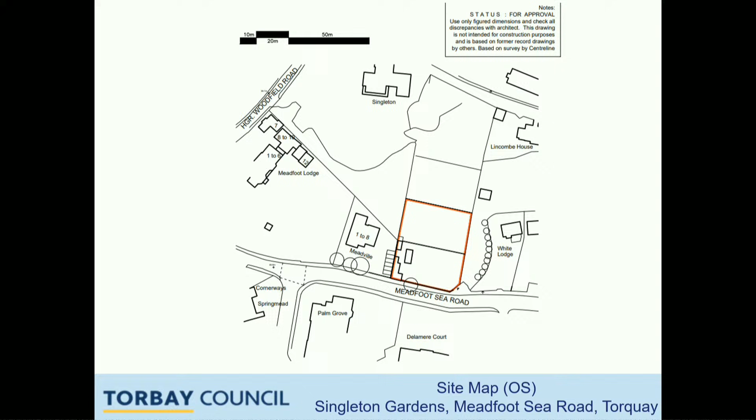Thank you. So the application site is Singleton Gardens, which featured a residential dwelling with an associated garden on the northern side of Meadfoot Sea Road in Torquay. The property was a 2-storey dwelling which was modest in scale and set within a large plot. The site featured stone and rendered boundary walls, and the land rises from the south to the north. So the site is located within an existing residential area, is designated as flood zone 1, is situated within the Lincombes conservation area and is subject to an area tree preservation order.

So householder planning application P/2023/0994 was granted consent on the 5th of March 2024 for alterations to the existing dwelling, which included the demolition of existing extensions, formation of two-storey and single-storey extensions, roof alterations and replacement fenestration, demolition of the greenhouse and outbuilding, landscaping and associated works.

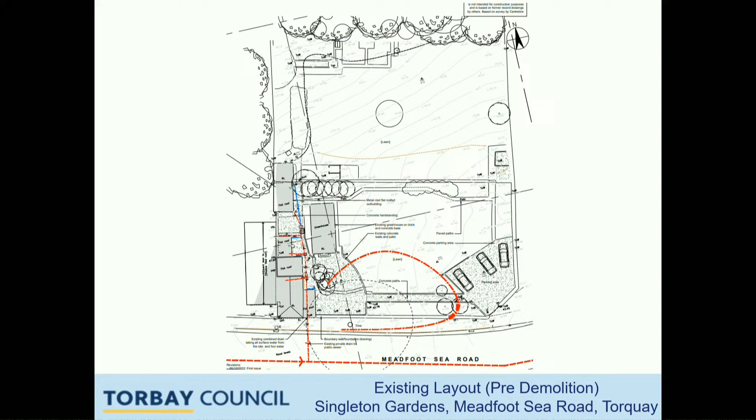So this plan shows the existing site layout pre the demolition works. You can see that the existing dwelling was located in the southwest corner of the plot and was built into the boundary walls. The plot included a number of disused buildings, including a greenhouse which has now been demolished, and there is an existing vehicular access at the southeast corner off of Meadfoot Sea Road.

So the current application is seeking to regularise the unauthorised partial demolition of the original dwelling house, including a boundary wall facing Meadfoot Sea Road, and seeks consent for the construction of a replacement dwelling. The application also seeks consent for retrospective demolition of the greenhouse and the demolition of the outbuilding, which were previously approved but no longer authorised, given the previous consent authorising this is no longer implementable.

So the key differences between the previously approved application and the current application is the partial demolition of the original dwelling and wall facing Meadfoot Sea Road and the rebuilding of the dwelling using modern materials and methods. The wall facing Meadfoot Sea Road will be rebuilt using reclaimed stone where suitable, and externally the footprint of the replacement dwelling is the same as the works approved under the previous consent, as is the height of the building and the roof form.

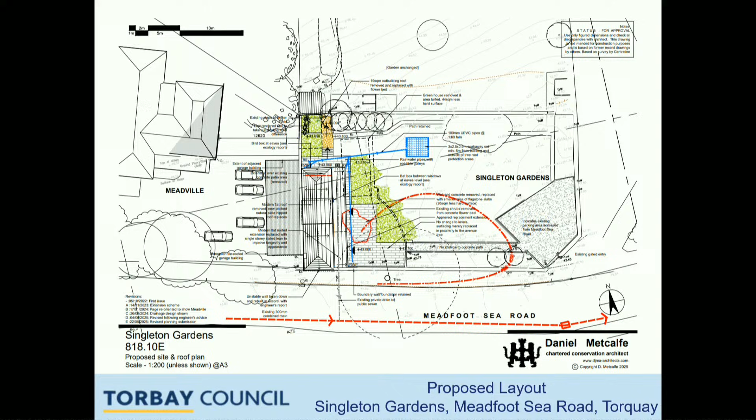So the proposal also includes landscaping works, which will include the removal of an existing low wall and area of concrete adjacent to the dwelling, which will be replaced by flagstone slabs and a larger area of lawn. So the greenhouse and outbuilding, which will be demolished, are shown on this plan in dashed black outline, and the greenhouse has already been demolished.

So the following slides are just quickly showing you the comparisons between the approved householder application and the current proposal, just to allow for easy comparison. So on the left is the approved ground and first floor plans, and then on the right is the currently proposed floor plans.

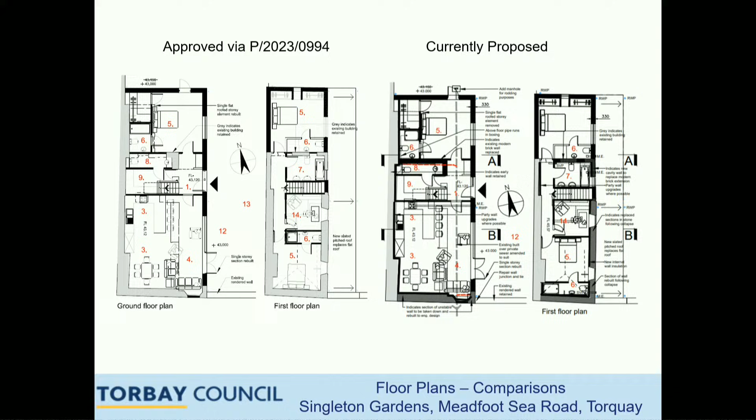The top set of elevations are the approved north and south elevations with the corresponding currently proposed elevations below.

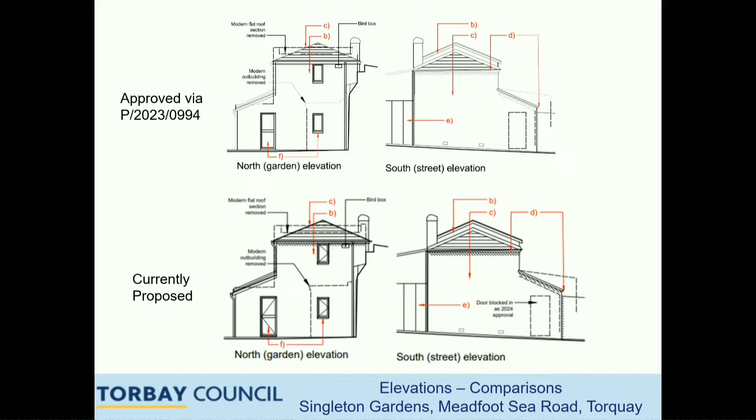Just lastly for comparisons, the top plan is the approved site layout plan and the bottom plan is the currently proposed site layout plan.

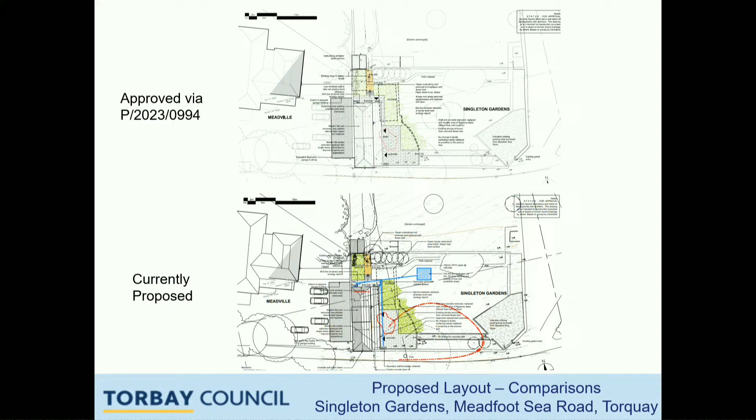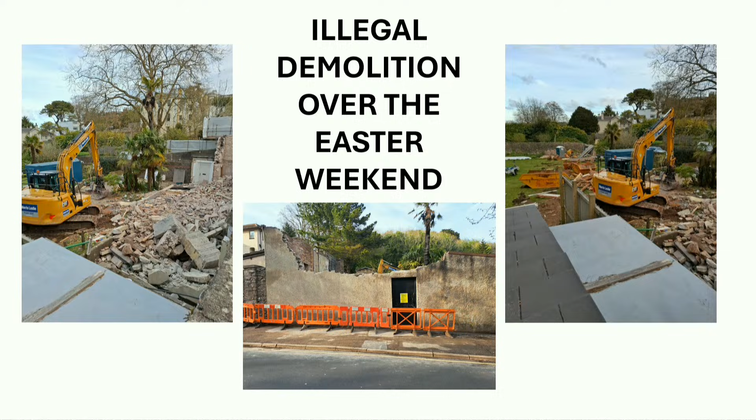The Design, Access and Heritage Statement says that during consented demolition work, the remaining walls were in a perilous state. Therefore, the building team chose to demolish them. It was unfortunate that this perilous state had not previously been identified when preparing the earlier planning applications. It was also unfortunate that this discovery only came to light over the 4-day Easter weekend when it was impossible to contact council planning officers.

But since heavy demolition machinery, pre-arranged in advance, was already on site, demolition just went ahead anyway. The cottage had been identified as a key building within the Lincombes conservation area. Its unauthorised demolition is a breach of the law. The community was shocked and outraged. After local outcry, and thanks to councillor intervention, a stop notice followed by an enforcement notice were issued. Essentially, the enforcement notice required reconstruction of the building in its entirety in a similar manner as possible to the building as stood immediately prior to the application, with reinstatement of a wall, and in the meantime for the materials to be retained on site. This application is to allow reconstruction of the cottage as it would have been had application 0994 been properly implemented.

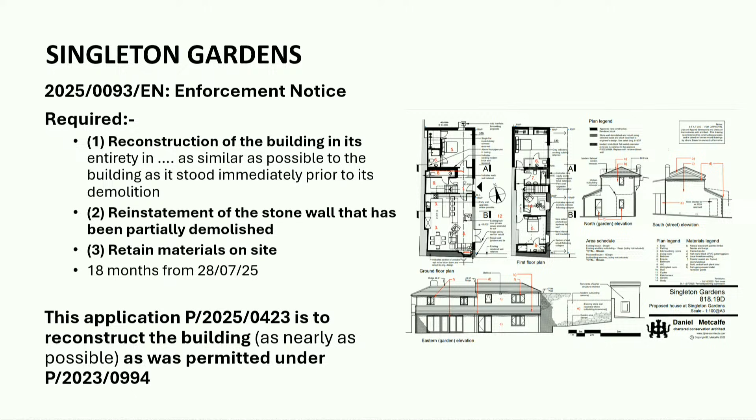This is the latest in a succession of applications and appeals for redevelopment of the site. 2 earlier applications for a block of flats were refused and an appeal dismissed. Subsequently, 2023/0994 was approved, but this permission can no longer be implemented because the cottage is gone. Enforcement notices 2025/0093 were issued. This is yet to be fulfilled. Appeal 2025/0033 was lodged against those notices, and this has yet to be determined.

Application 2025/0365 was lodged, which the council has wisely refused to validate. This is now subject to appeal 2025/0038. Finally, there is this application, which does nothing but sow further confusion on an already muddled series of applications and appeals. The forum also notes separate applications by this developer.

P2025/0362 and 0363. These were for the replacement and improvements of a part-collapsed boundary wall on Lincoln Drive. This wall is also in the conservation area and was also demolished without permission. It was improperly reconstructed and included an unauthorised vehicle entranceway. This further illustrates a lack of respect for the law and for the planning process.

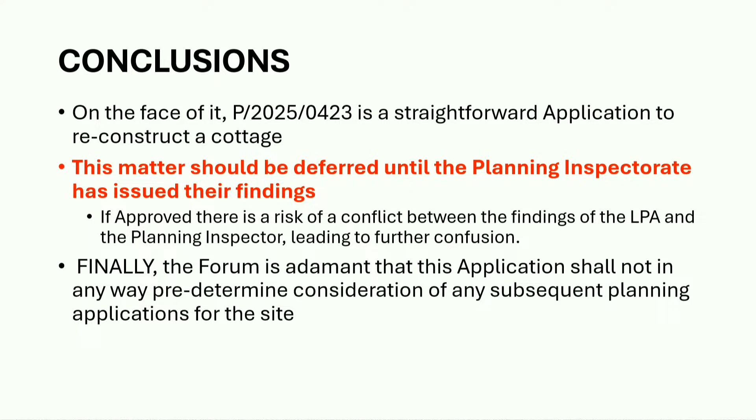So on the face of it, 2025/0423 is a straightforward application for reconstruction of a cottage. But the forum believes that this matter should be deferred until the Planning Inspectorate has issued their findings on the other matters. If the committee proceeds to approval, there is a risk of conflict between the findings of the local planning authority and the planning inspector, leading to further confusion. Finally, the Neighbourhood Forum is adamant that this application shall not in any way predetermine consideration of any subsequent planning applications for the site. Thank you.

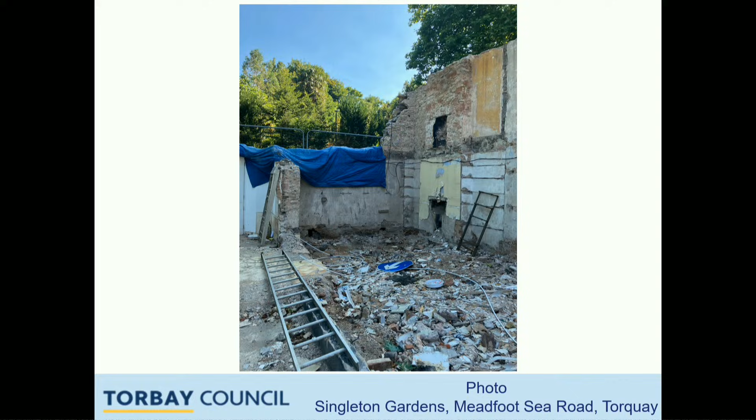Thank you, Chair. Thanks to the officer for the report. My question is, if the result of the appeal against the enforcement notice had been known to us before today, is it foreseeable that the findings of that appeal would materially change the contents of your report in any way? No.

Councillor Billings: Thanks, Chair. Ms Clark, the point advocated by the speakers earlier was that this application should be refused. Councillor Foster made it clear that the previously approved dwelling should be rebuilt in accordance with the enforcement notice. Could you set out the practical difference between building this, if approved, and rebuilding the previous building in accordance with the enforcement notice? What would be the practical difference between those two, please?

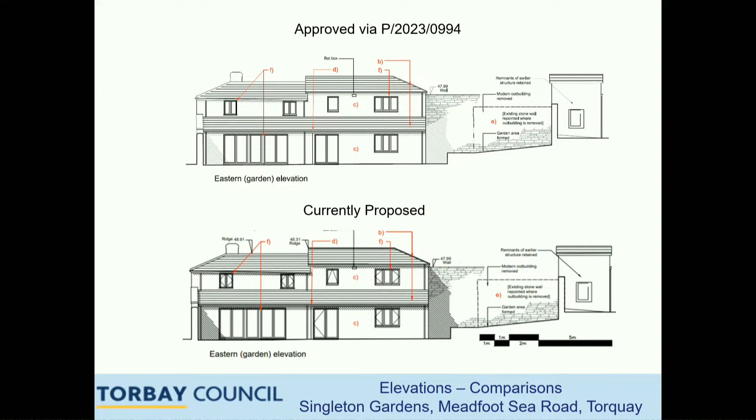So I'll take you to the existing plans. The enforcement notice asks for it to be rebuilt in accordance with what we've got on screen now, which is how it looked previously before demolition. The planning application in front of us is looking for it to be rebuilt as per the plans on our screen. Just to note, if this application is subsequently approved, there would not be a requirement for them to actually build out that development. That is why the enforcement notice is still running, which is our legal mechanism to make them rebuild something on the site.

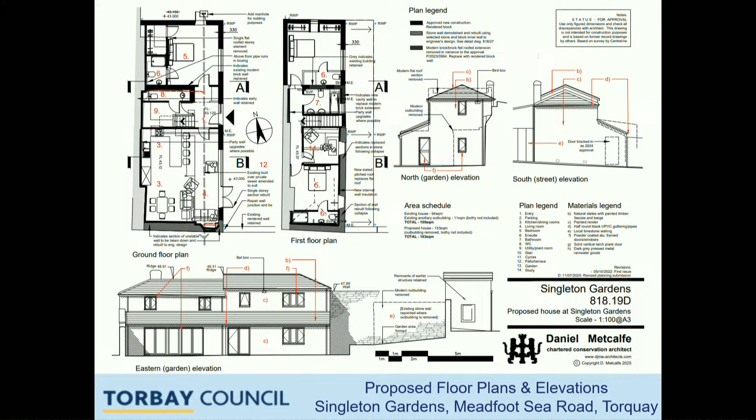So in practical terms, the substantive difference is: if this committee consents the proposal in front of us, what would be built on site would be consistent with the application the committee previously approved. Whereas if we go down the enforcement route, we can only, as a council, enforce the rebuilding of the building that was previously there before any amendments are undertaken to it. Yep, that's correct.

And Chair, final question if I may. In your answer to Councillor Fox, you referred to part retrospective. That was a point made by the Neighbourhood Forum, who referred both to the partial demolition and full demolition, and also the fact that this was, in their view, a retrospective application because it's already been demolished. Is that clearly set out as far as it needs to be in the application form and in your report, and does it make any further substantive difference on that point, please? I'm satisfied that all necessary procedure has been undertaken. Thank you, Chair.

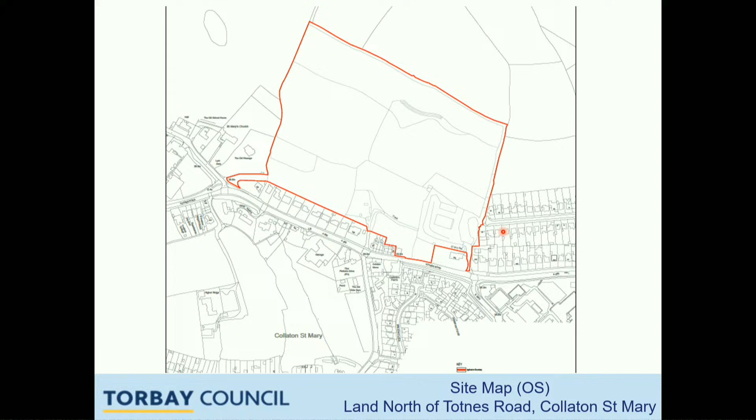So the site in question is outlined in red here, which is largely set behind properties off the Totnes Road. We have the church and vicarage to the west, and Borough Park Road to the east as the chief reference points.

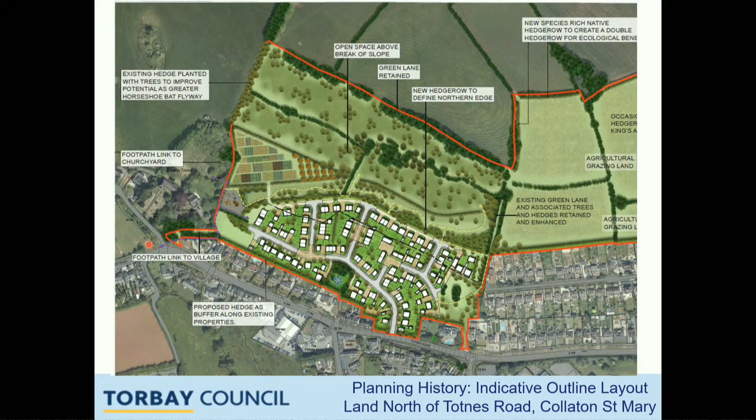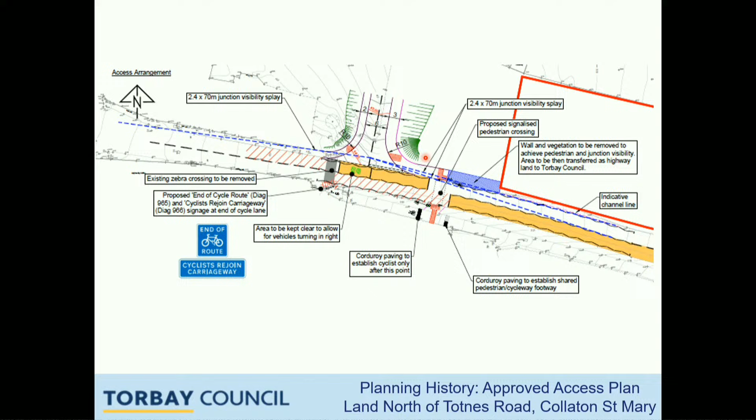This is not for consideration today, but for detail: this is the approved access into the site, roughly in the location of the existing zebra crossing, the grey section, which is to be removed and replaced with a light-controlled crossing on the inward bound side. This is the area where that junction will be created as part of the detail already approved.

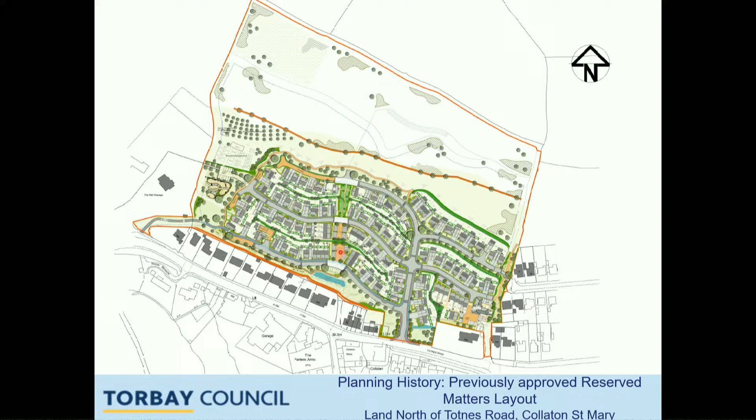Final slide on the context. This is a previously approved Reserved Matters application, approved in May 2023 by the following presentation at the committee. This scheme was reported to members with some degree of concern around the suburban nature of the layout, with the extent of highways. However, the officer recommendation was that, subject to seeking improvements to the materials, the concerns did not outweigh the public benefits of the scheme, and it was recommended for approval. Members agreed with that decision. This is a consented scheme, and I believe it has commenced.

Moving on now to the proposal before us. This is the now proposed Reserve Matters layout. Similar to the indicative outline proposals and the previous Reserve Matters, we've got development on the lower slopes with public open space on the upper slopes. Again, this developed area loosely runs in line with Borough Park Road.

The approved main access down here is supported by a wide landscaped opening, a concept supported by the design review panel that this scheme previously went to prior to the application. The road network here is more informal than that previously approved in the historic Reserve Matters, presenting a less dominant and softer framework for development moving forward. We've got positive permeability for pedestrians and cyclists.

We've got an access on the eastern side running through, and there's a proposal for the development to go to the edge of the site to the west at Borough Park Road for an east-west pedestrian and cycle route. There's also permeability north-south. Away from the road network, we've got some stepped access through here. We've got the central spine, which winds its way up from the entrance through to the play area and the development, and some pedestrian access points linking through, with intermittent points as well.

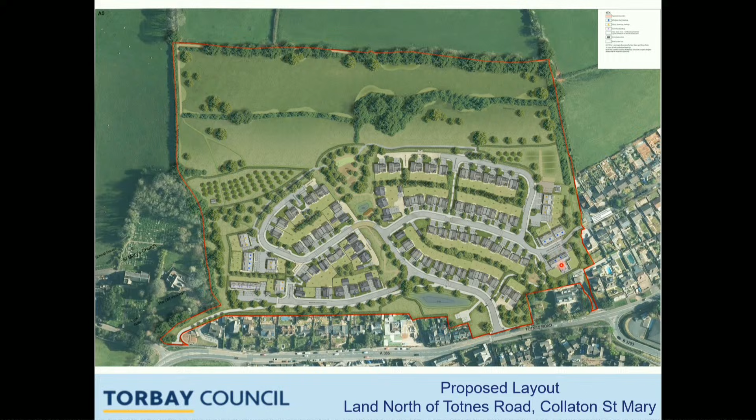In terms of affordable housing, the scheme provides 30 affordable housing units within the 100 units. The mix was established through the outline consent, with 10 social rent, 10 affordable rent and 10 shared ownership.

We've got principal areas within the southwestern corner here, served off 2 different roads because of the rising levels. The blue dots are the affordable rents, so we've got affordable rents on both sides of the site. The orange dots are shared ownership—some down in this little phase, some in the phase above, and some in the green phase up there. The purple dots are social rent, which are down in this section, and again within this mixed dwelling and apartment block here.

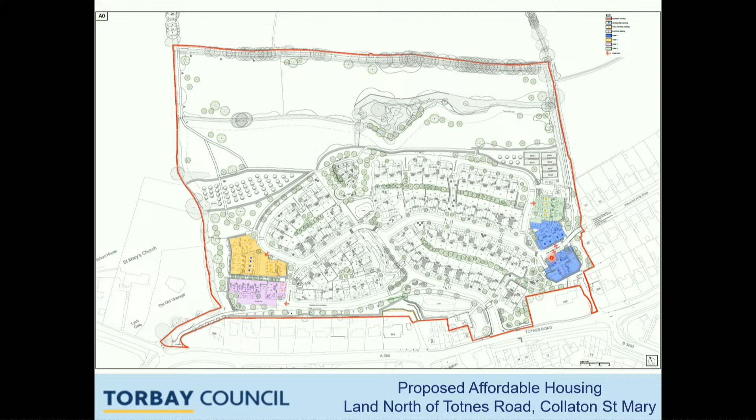This is the most recent proposed road adoption plan. It takes into account the road network and the main footpath links through—the light blue here are also proposed to be adopted—and also takes in the connections to the edge of the site to the west and to the east here to Borough Park Road.

This is a brief framework for the proposed pedestrian and cycle routes within the scheme. We've got the main east-west run here, so you'd go along from the Blagdon Road entrance and either use the stepped access through here or go around on the road network. You've also got north and south routes centrally, on the western part of the site and the eastern part of the site, providing a positive framework for movement through the scheme.

In terms of the public open space, there are proposals for mown footpaths through this space and also a perimeter recreational walkway through the sunken lane, adjacent to the established hedgerows.

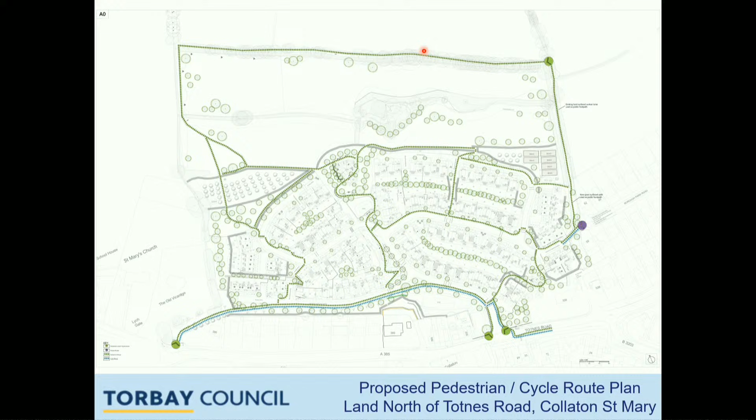This is a proposed drainage plan, which is supported by the council's drainage engineer, and there are no objections either from South West Water or the Environment Agency. In terms of surface water drainage, it's principally a controlled system with a controlled discharge via connection to the local public sewer, which in turn feeds at a controlled rate to the local watercourse. The system includes a series of attenuation tanks and swales that act partly as a feature of the drainage system, but also as part of the green infrastructure and landscaping.

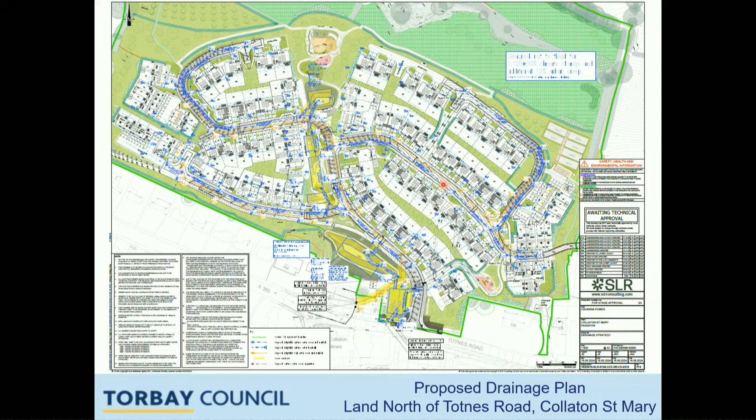The foul system is proposed to be adopted, or put to adoption, through a Section 104 process, and again follows the general pattern of the road network in terms of the positioning of the system through the scheme.

Moving on to design and appearance, the proposal presents a character area concept with 3 pockets seeking to respond to the immediate context within the scheme.

Firstly, here on the eastern edge of the site, there's a small pocket seeking to deliver a square entranceway from Borough Park Road, which has a form of gateway character. This was a concept supported by the design panel.

Character area 2, through the green spine, we've got properties addressing the landscaped area, treated in materials that seek to reflect the landscaped character here, with stone and brick and boarding in natural colours generally proposed.

Character area 3, down in the southwestern corner of the site, seeks to respond to the listed church and vicarage adjacent here. We've got materials including a choice of red stone, red brick, and natural slate roofs, in a simple dwelling form providing a simple palette that reflects the buildings adjacent.

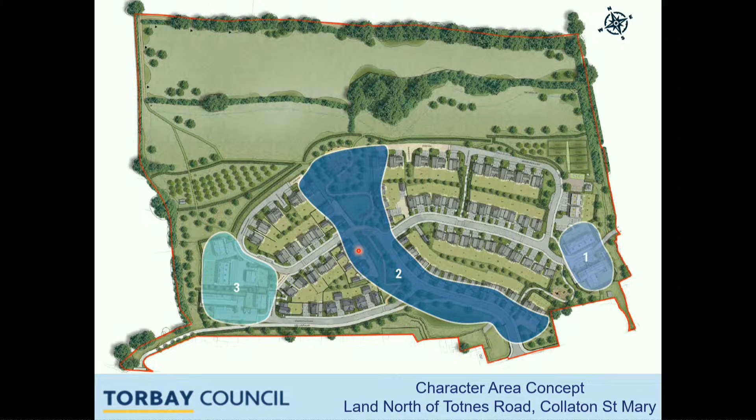So just running through some of the house types for you, to give an understanding of the visual appearance of the scheme. These first few slides are the proposed elevations within character area 3, down towards Blagdon Road and the church and the vicarage.

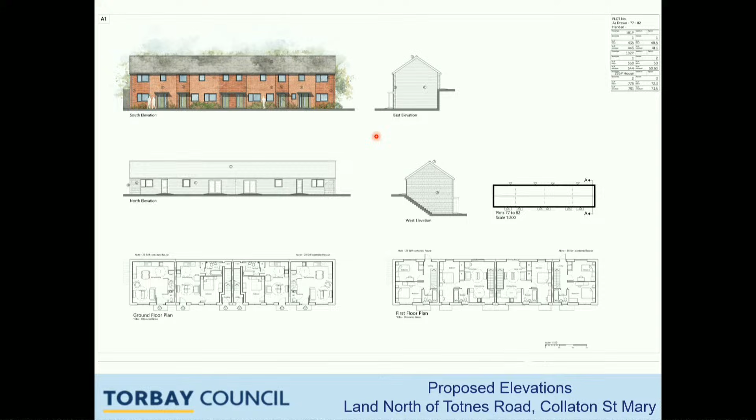Moving on to the area on the eastern extent, close to Borough Park Road, render is the base material with concrete tiles. Again a simple dwelling form, 2-storey pitched roofs.

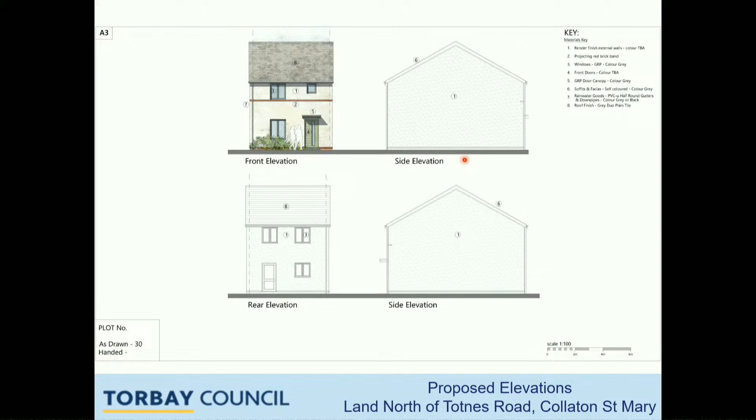Moving across the remainder of the site, we've got some house types that have different treatments depending on where they are within the site. For example, this house type at the lower end of the site, closer to the vicarage, and along that general southern run, we've got red brick and red stone with slate roofing.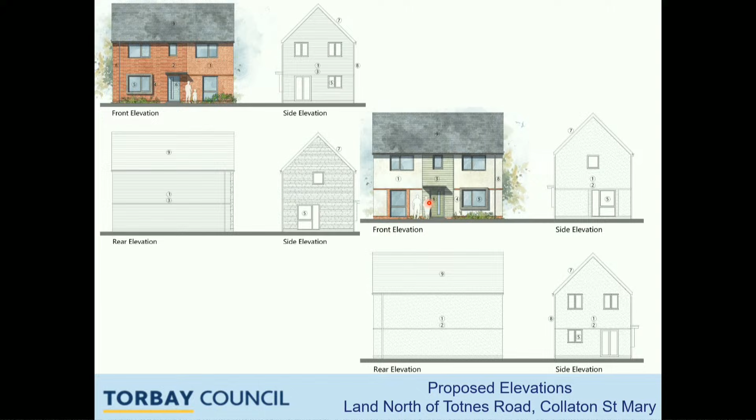Moving through again - the property on the left will be that view low down the site on the main road through from the main access, but the dwelling on the right will be a bit higher up in the site as it transitions to a different sort of character. Similar treatment for this.

Again, this just gives you an understanding of the dwelling forms here. As you'll see, quite a few of these properties are treated in a split level form, which is the concept to try to manage the rise in levels as you go northwards up through the site.

A couple more dwelling types. This is the northernmost dwelling type, which you'll have looking northwards up towards the hillside, and the 2.5-3 storey element will be contained away from the public view, looking southwards there.

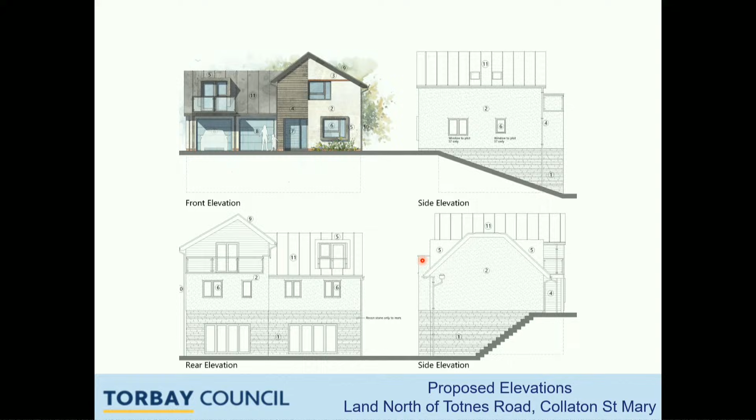Oh, sorry, I'll just pop you back.

Looking at some of the border treatments here, you've got the green lines, which are Devon banks with hedge tops, so they frame most of the key public areas of the site. You've got the transition from the development area to the public open space in the north, but also sections that run around and frame some of the more prominent public areas.

And also the southern boundary that terminates the development site as you get to the properties on the Totnes Road. In terms of walls, the prominent public facing walls will be a mixture of brick and render, in terms of secure and robust material. Fencing is generally contained to the private borders within the scheme, away from the most evident public views.

In between some of the key streets, we've got areas of planting which sit outside of the private areas of plots, so they'll be part of the public open space management plan, but non-accessible, which provides some longevity to these sections.

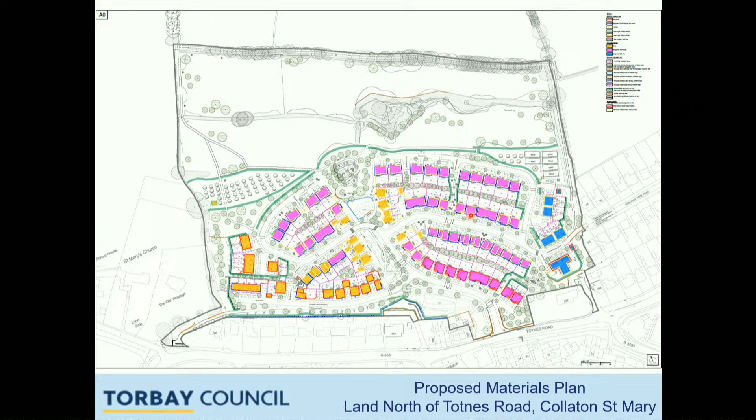So just trying to illustrate the scheme for you, this is a couple of slides of street scenes, highlighted with yellow here. This is the southernmost street. If you take the church, which is off-site, the first building on the western side would be that mixed apartment and dwellings, a short terrace, and then you run along that southern street with these stone and brick buildings.

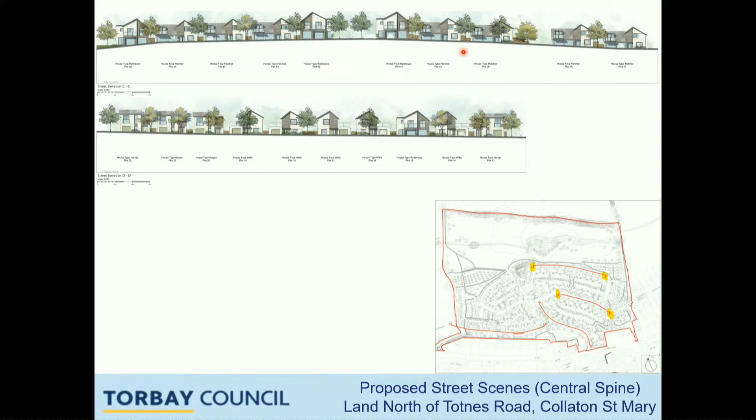Finally, a couple of street scenes highlighted yellow again, and now we've moved into the rendered area, which is broken up with boarding panels, proposed to be in two different types, either natural or more coastal colouring.

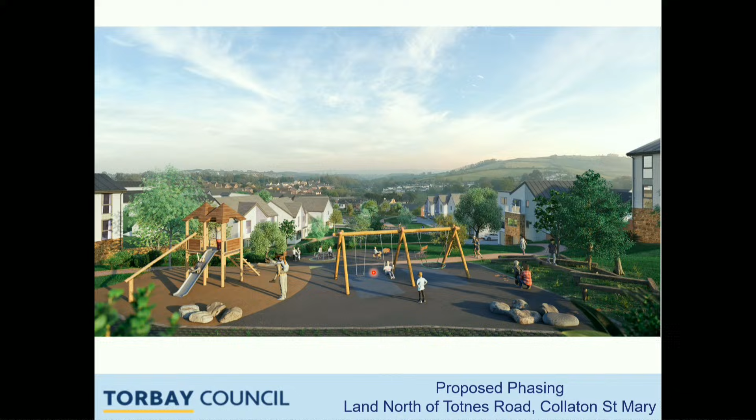And from that play area at the top of the site, this is an illustrative view, just to show you a little bit of an artist impression of the site.

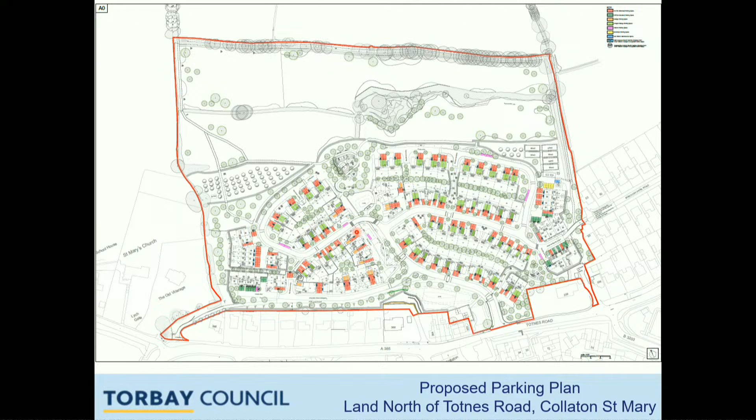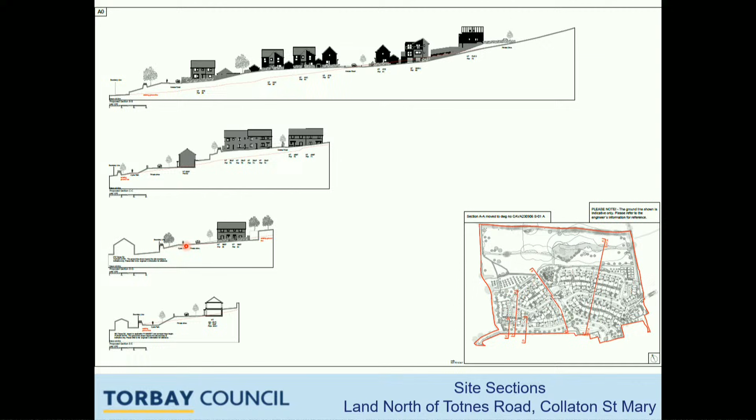This is the section through the scheme. The top section is the central spine, and the bottom three sections are around the southwest corner. These three lines show that you've got the boundary treatment, the hedge top Devon bank, then the landscape buffer, then the cycle pedestrian route, the road, and the properties.

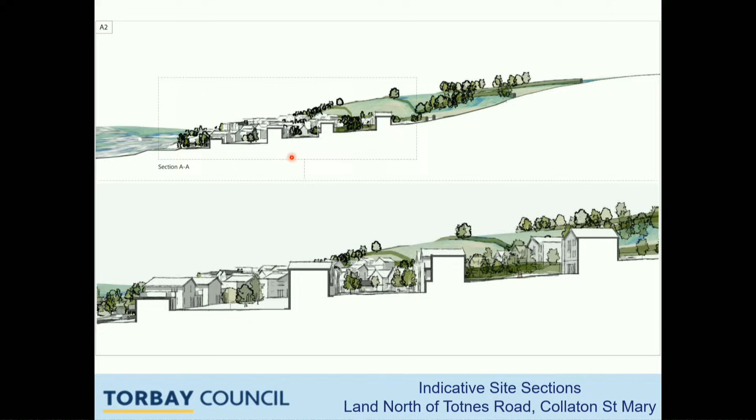A bit more of an illustrative site section for you, to see how the development sits in the site.

So obviously the key issues have been outlined within the committee report, just touching on some headlines for you given their relevance. The principle of development has been established through the outline consent, and it's an allocated site through the future growth area as well.

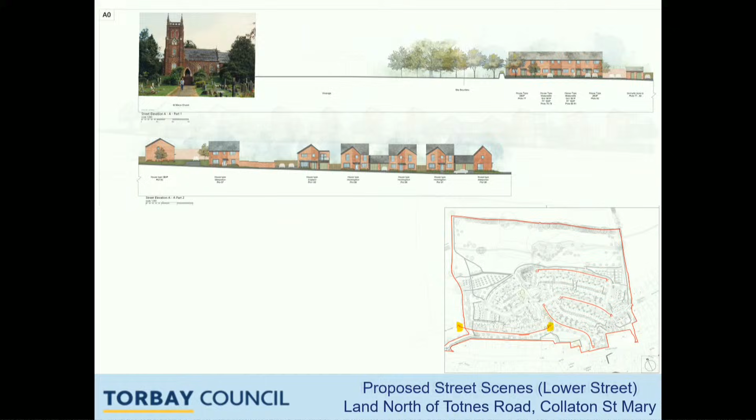So if we just, oh, we're not going that way. Let's go forward. Sorry, I've presented too many slides. That's all right, takes up a bit of time. Right then, so here we are. Sorry. Phasing plan. There we are.

As I touched on during the presentation, we've got phase 1 in green, which delivers the pedestrian link to the Blagdon Road end, which is very positive, with a degree of landscaping within that phase. Then the majority of the public space is in blue, phase 2, which brings it forward early in the scheme, which is again positive. In terms of triggers to ensure that's done, I believe there is possibly a condition about the timing of landscaping within phases, to be completed within the first available planting season. I am happy to ensure there's a firm footing so that everything is complete, and also workable at the same time, without undue stress on how the development comes forward. But this phasing plan presents a good broad approach in terms of ensuring we do get the public open space early.

And I think there are conditions in the outline about landscaping being done within the first available planting season. So if you're happy, I am more than happy to make a note to ensure that element is duly delivered on, with clarity, because you say it's obviously important to ensure things come forward at an appropriate time and don't get left or forgotten about.

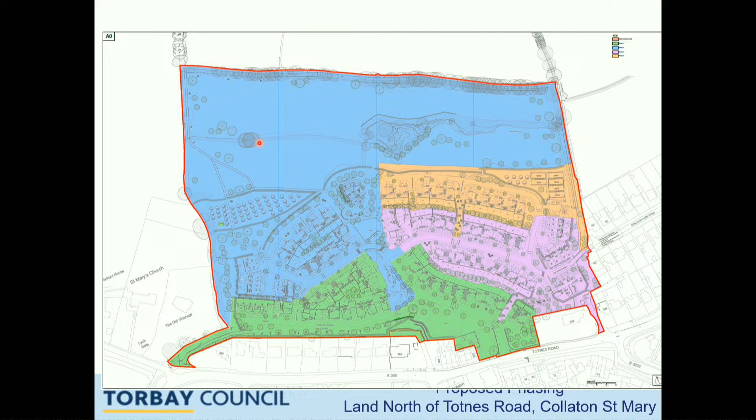Yes, obviously there's a lot of public open space and land with ecological value, so the landscape and ecological management plan will manage the space in terms of its ecological value and content moving forward. The mechanisms within the legal agreement, in terms of the open space and management plan, provide the framework for how it's going to be run, who's going to run it, and for the authority to know that detail. So it is in place, as in all major householding schemes, in terms of SUDs and open space management being submitted to the local authority.

Thank you. Our job is just to be aware of what could be problems, and I've had experience with management companies that hasn't particularly worked well, but I'm glad to hear what you've just said, Scott. So that's excellent.

On the issue along the southern, western, and eastern boundaries, page 76 mentions fencing at 1.2 metres, and I was mindful it should be a tad higher because it will take time for the Devon Bank and hedging to get into place and provide security for the current residents. So I'm mindful, if colleagues agree, to maybe push that to 1.5 metres, but that was just a comment. Is that feasible?

So the conversations have been progressing in terms of possible treatments along that southern boundary. Obviously, in the long term, the Devon Bank and the hedge on top will mature and provide that permanent screen. In the short term, while it establishes, yes, I do think there's credible reasoning to provide something slightly higher. There have been discussions about a 1.5 metre post and mesh wire or stock-proof fencing, a chest-height type barrier, which I think is an appropriate boundary to provide greater security while that Devon Bank and hedge matures along the southern border. So yes, that's in discussion. I'm expecting an amendment to that effect.